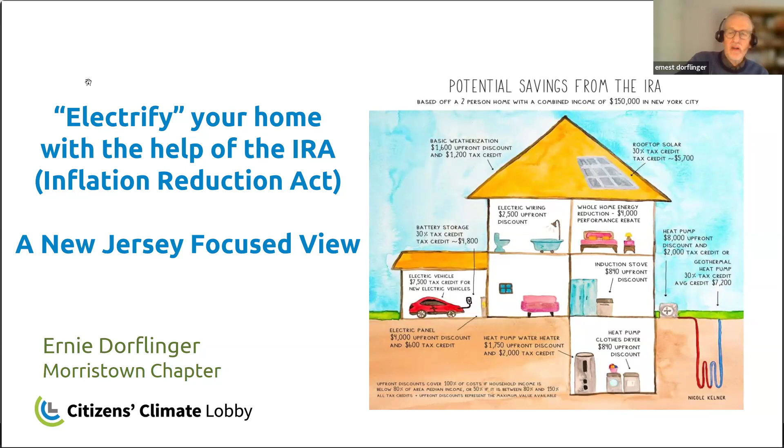Okay, so I'm going to talk about electrifying residences in New Jersey. This is a New Jersey focused view. A lot of this became very topical with the passage of the Inflation Reduction Act, and you'll hear a lot about that in this talk as well.

I've given several presentations on this topic over the last year or so, and it's designed really for the average New Jersey homeowner, to give them some information, not too deep, but some information, and with that, some confidence that they could hopefully start to begin the process of electrifying their home. It is a process, not just a one-item thing. I also am a little bit concerned about whether there's more we could be doing to help ensure the success of residential electrification in New Jersey. I have some ideas, and I'm also interested in other people's thoughts, and I'm going to talk about that with a few slides at the end of the presentation.

The Inflation Reduction Act was passed with a lot of fanfare and excitement. It's been a year and a half now, or even slightly over. And what it provides for home electrification is financial incentives in the form of tax credits and then rebates.

The tax credits are available now. You can put them down on your 2023 taxes. I did some windows in 2023, and I'm getting the tax credit for those. Rebates aren't ready yet, however.

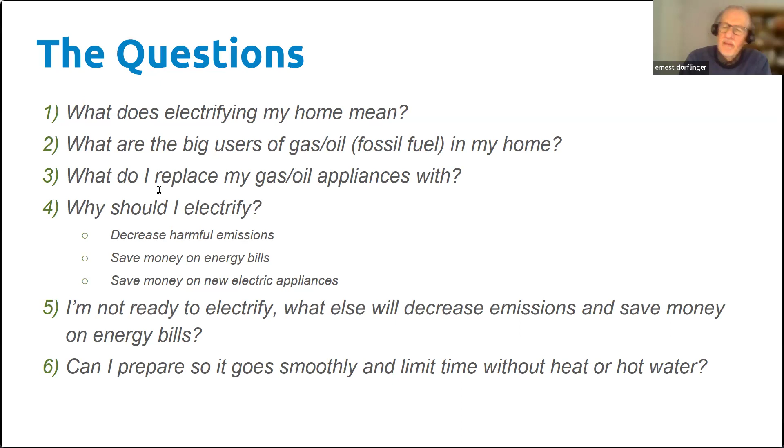So what does it mean? It means, for the most part, replacing the gas and oil burning appliances within your home—if you have a furnace, a boiler, gas-fired hot water heater, or oil-fired gas clothes dryer, gas cooking—it's replacing these fossil fuel burning appliances.

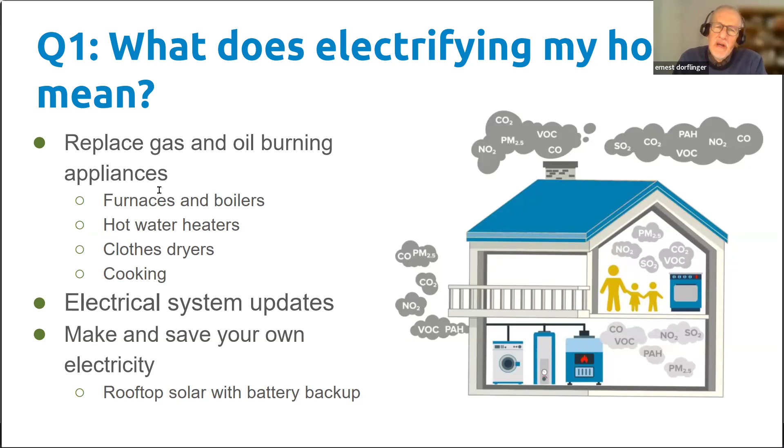As you can see, it's illustrated cutely in that little house, where we're pumping these invisible pollutants out into the air. To put in these new appliances, your home may need electrical system updates—we'll talk about that. And if you've got the right roof, orientation, and it's sturdy, we'll talk a little bit about rooftop solar and battery backup as a way of making your own electricity and storing it.

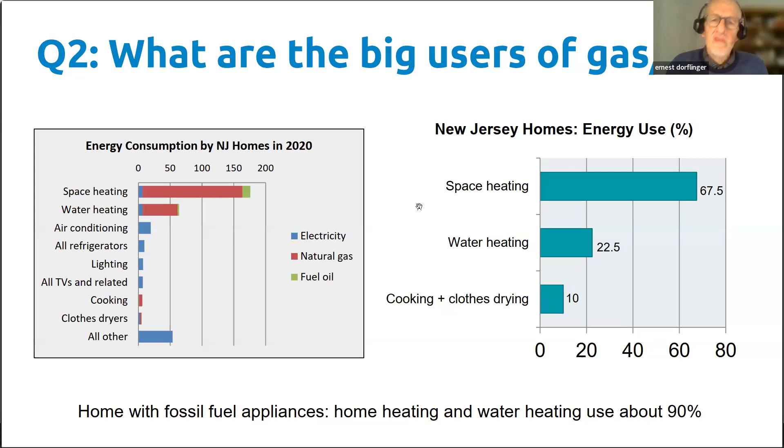Water heating is about a fifth to a quarter, and the other two common items, cooking and clothes drying, are relatively small at 10%. So if you're looking at decreasing emissions and want to attack that in your home, the place to go is your space heating and then your water heating.

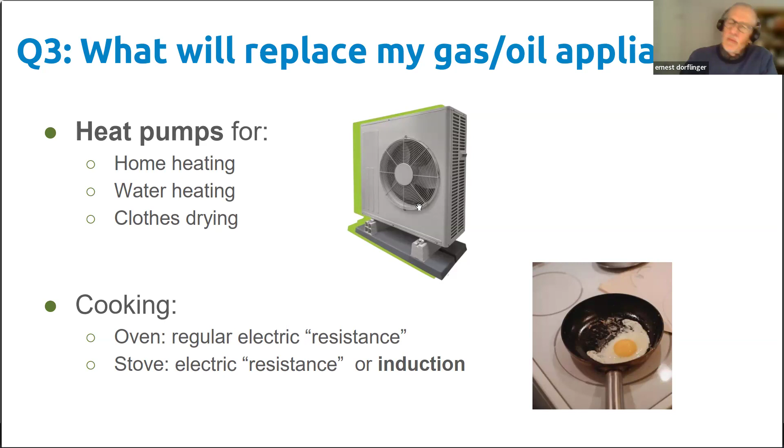So what kind of devices are going to replace those things? Well, the big thing is heat pumps. There's a picture of an air source heat pump there for heating the space within your home. There are heat pump water heaters becoming much more frequently available, and clothes drying as well. Heat pumps cannot provide enough heat for cooking, so the electrical use there is what we call electrical resistance heat, which is what a traditional electric stove is, and more recently induction electric stoves, which we'll talk about later - but I'd imagine many of you have some familiarity with that already.

Now stepping back to the three main reasons - everybody understands this to some extent. It's to decrease harmful emissions, to save money on energy bills, and to spend less on new appliances. You can buy new electric appliances for less than replacing your gas appliances.

So what are the harmful emissions? We can sort of put them in two categories. Global warming gases are harmful by causing climate change - CO2 is the biggest culprit, but more potent are methane and nitrous oxides. Methane is what our natural gas is, so when it leaks out, it's a very potent greenhouse gas. Nitrous oxides are also not only toxic but also very potent greenhouse gases. There are others too, but these are the main three.

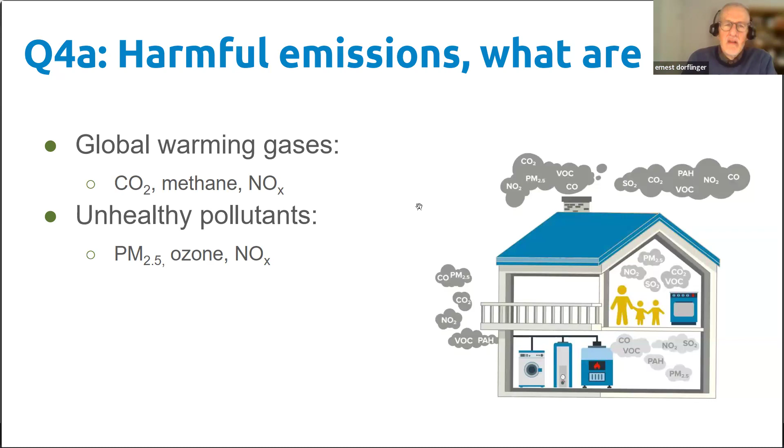But also, when we burn these fossil fuels, we create unhealthy pollutants that harm our health - these are particulate matter, or for shorthand, small particulate matter, so PM 2.5 sometimes called, ozone, and nitrous oxides. So if you electrify your home, you're going to diminish the amount of these harmful gases and pollutants.

Now, if you fully electrify your home, you will eliminate those emissions from your home, but you're using electricity probably from our grid, and our grid is not entirely clean - it's about 50% fossil fuel, 50% clean, including nuclear. But because of the efficiency of heat pumps, when you switch over and still use grid energy, you're probably decreasing your emissions by about 75%. And that's only going to get better over time as the percentage of clean energy in our New Jersey grid goes up.

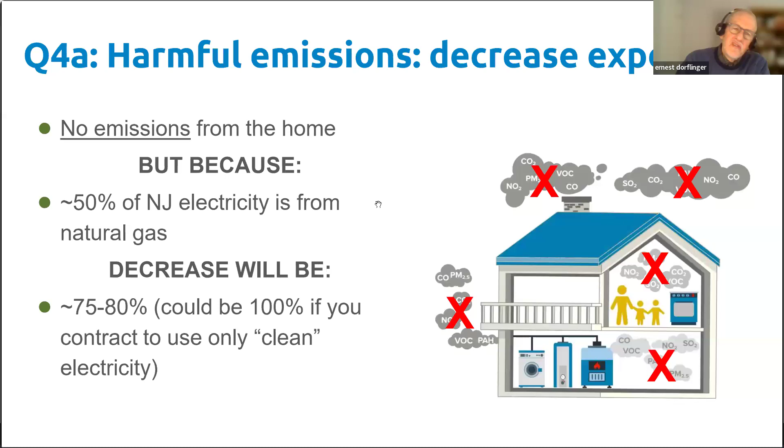And also, if you put in a ground source heat pump, you will save on your heating bills. But in New Jersey, an efficient gas furnace and an air source heat pump might be pretty close in terms of energy bills, especially in this PSE&G territory, which seems to provide a relatively low, comparatively low rate of natural gas. It's going to depend on what system you put in, whether you modify ducts or go ductless, but I would say there's not likely to be big energy savings today in New Jersey going to electric heat over natural gas heat.

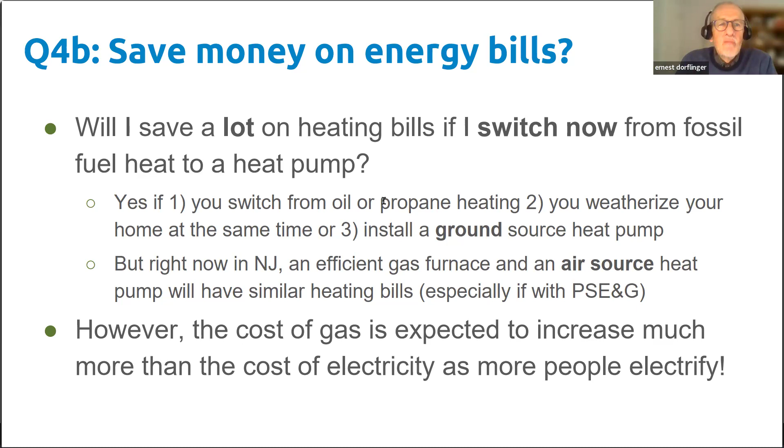This information comes from a study done in 2022 by the BPU in New Jersey. They're concerned about what people are going to have to face in terms of utility costs in the future, so they commissioned this study to look at what the predictions would be for the cost of electricity versus natural gas as heating fuels or energy sources. They looked out to 2030, for what they were calling the average New Jersey home, whether that home remained on gas heat in 2030 versus whether it switched to a heat pump.

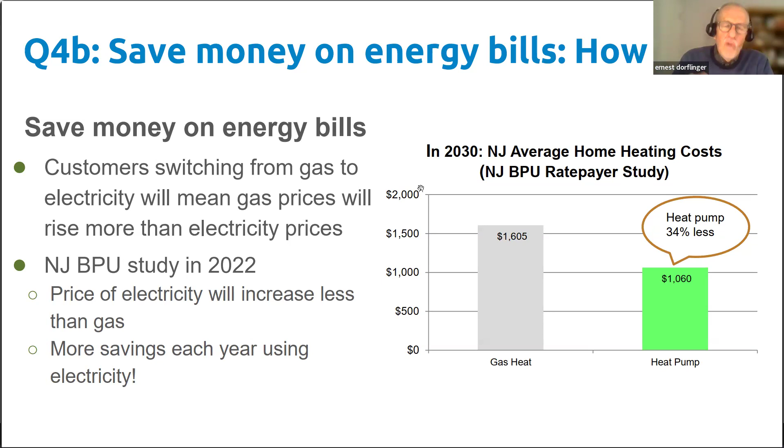Because of the rise in price of gas being more quick than electricity, there is a substantial difference in heating bills in 2030, from $1,600 per year down to closer to $1,000. Reading through the report, this seems to be due to the fixed costs of maintaining the pipeline systems for natural gas, which are shared among many people right now. As fewer and fewer homes require natural gas hookups, those fixed costs are going to have to be spread over the remaining customers, and that probably accounts for some of this rise in gas being quicker than the rise in cost of electricity.

A typical home can save about 15 to 20% on their energy costs. Leakier homes, as the Acadia Center reported, can save almost twice as much, maybe even up to 40%. There are a lot of leaky older homes in New Jersey. So weatherizing itself can save money on energy bills, but there is a cost to getting it done, and that's going to vary depending on what kind of rebates and other resources are available. Weatherizing is something to not forget about.

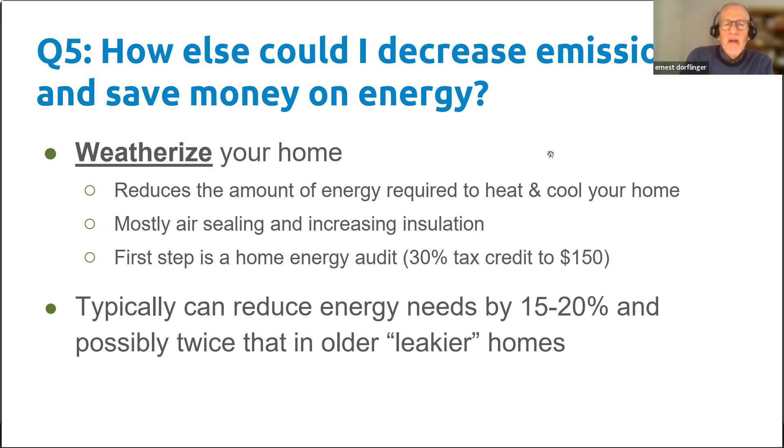Putting in a heat pump system can be a little time consuming. It's much easier if you've got a furnace - they find the current version of that furnace and they plop it in. They don't have to adjust too much; maybe there's a little additional electronics involved, but it's not as complicated as moving to a heat pump. It will get easier as heat pumps become more common, but right now there does seem to be, in many cases, a slower installation when it comes to a heat pump.

This happened to my son during the cold snap last year. Their furnace went out, and we had the contractor in, and we said, 'How about a heat pump?' And he said, 'Well, a heat pump, maybe 2 weeks. I can have a furnace in tomorrow.' So they put the furnace in.

Just one reason this can happen is you may need to change your electrical supply. We'll talk about that more, but you may need an electrician to come in to provide the power for the heat pump. And acquiring the heat pump sometimes takes a little bit longer.

So what I'll say here is make a plan. If you can avoid it, try to anticipate when your system's going out. Is it breaking, needing a lot of service? Is it very old? Even if you want to wait a little bit, it may be worth having someone come in and look at the system and give you an estimate on a new system, so at least you've got the jump on what you might want to do should your system go. Making a plan is a good thing to consider.

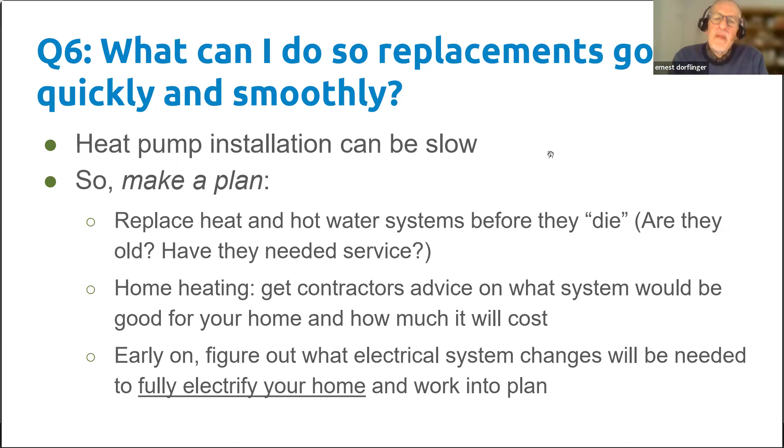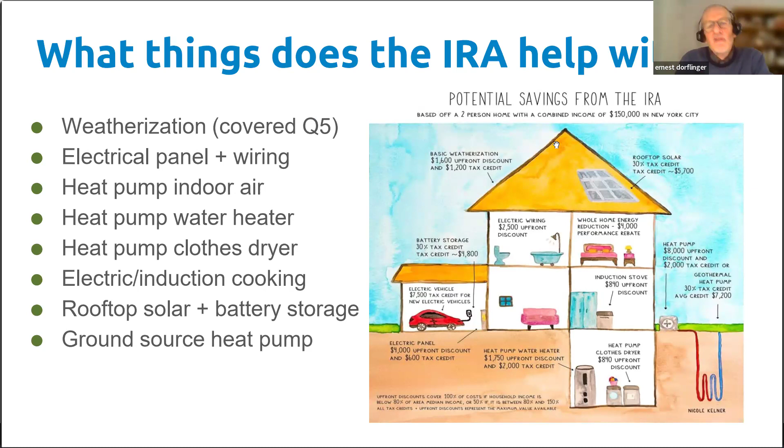These are the items I'm going to go through rather quickly. I covered the weatherization already in question 5: what can you do if you're not ready to electrify? I'll go through these other items one by one, shown in that cute graphic there.

So in order to power these appliances, you may need to have the supply of electrical energy to your house increased, which is a separate thing from needing to increase your circuit breaker box, or your electrical panel, as it's sometimes called. If you have a panel that has, say, 200 amps, you're probably fine. If it's less than that, you may need to have it updated.

It's going to depend on things like whether you have an EV, whether you have a solar system, whether you're comfortable with switching from one item to another. So if you have a 100 amp panel, you might need to have some kind of a smart switch or something. So you need to give that some thought as to whether your panel may need to be increased.

The heat pumps in general, except for maybe window heat pump units, they're usually 240 volts. So are most central air conditioning systems. So sometimes you don't need to update because you're putting a heat pump near where the central air was, so you're fine. But other times you may need to put in 240 volt circuits. That's also true for hot water heating heat pumps, except that they're now coming out with 120 volt versions of the heat pump.

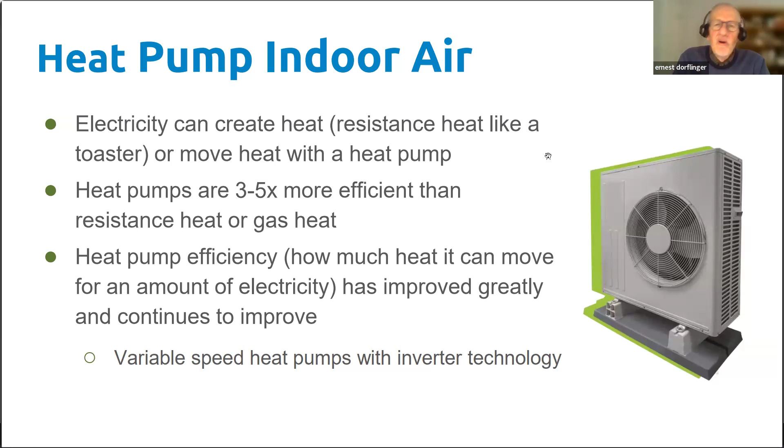A term you'll hear for these more modern heat pumps is variable speed heat pumps, or you'll hear inverter technology. I can't speak to those in great detail, but those are the words you look for. How well do they work? Well, one example is the Mitsubishi H2i hyperheat system, and they're almost fully efficient. They're as efficient in providing heat at 0 degrees as they are at 50 degrees. But those are cold climate heat pumps. Not all heat pumps are created equal.

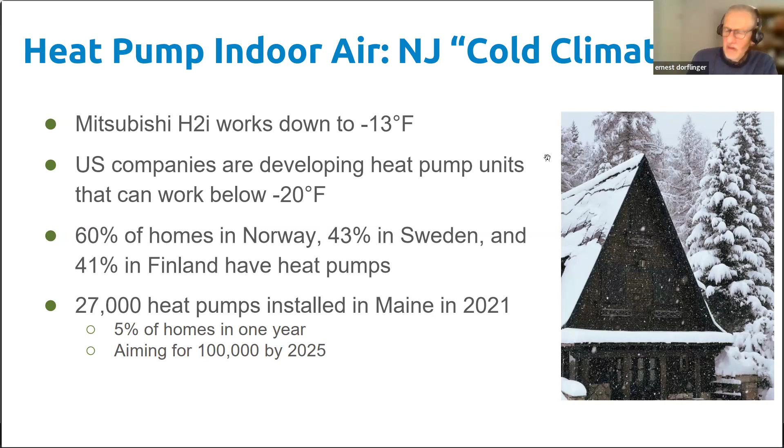And there's a big effort going on now, and there's actually a challenge that the Energy Department is running for companies to create much more effective cold climate heat pumps. But they're out there now. They do exist. You can see the numbers there for the Nordic countries. They're putting in heat pumps like crazy. They're happy. Maine is very happy. They have a lot of heating oil up there, so it's very expensive. So the state chose to support this transfer to heat pumps, and it's been happening well ahead of schedule. So cold climate heat pumps are real. And in New Jersey, if you have a cold climate heat pump, that's all you really need.

Heat pump water heaters, similarly. You can buy an electric resistance water heater, but it's going to use 3 to 5 times as much electricity as your heat pump water heater. And as I mentioned earlier, 120 volt versions are now becoming available. I think there are 2 on the market, a third to come soon.

They're going to get better too. There's a lot of competition in this area. A couple things for homeowners to keep in mind: it takes the heat out of the air around the hot water heater. So the area in the region of the heat pump water heater can get cool, so people need to be aware of that.

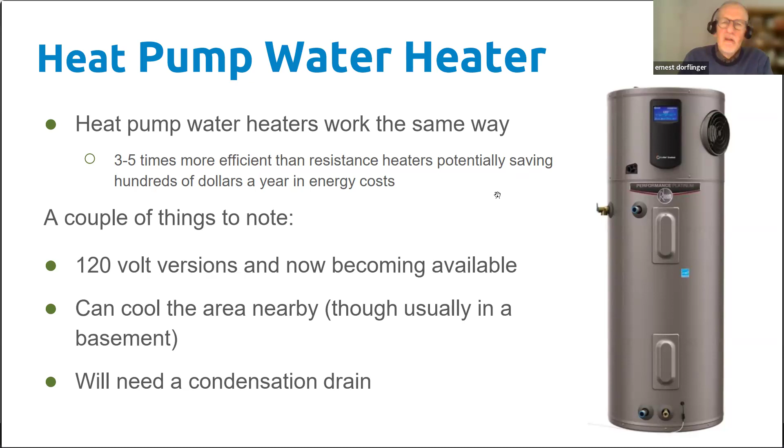And it will need a condensation drain, something you don't need with your gas-fired water heater. It's not a big deal, but you've got to have a place for that water to run off. So new technology, there's just often a new twist. Heat pump clothes dryers, basically the same story. They may take a little longer to dry. They will need a condensation drain. Not a big deal. It's next to your washing machine.

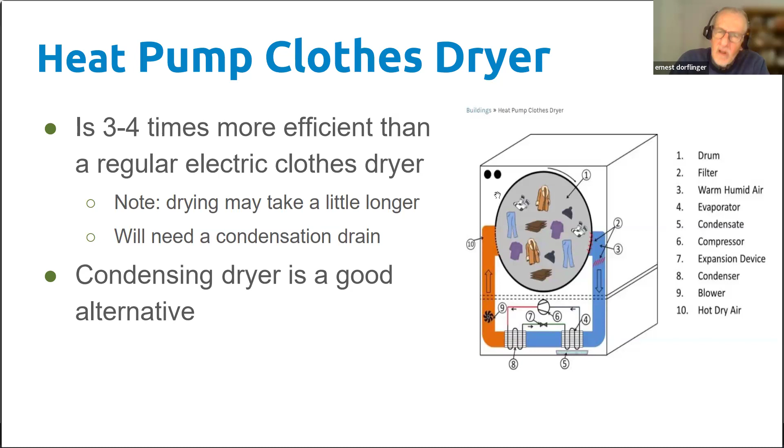And other than heat pump clothes dryers, what they call a condensing dryer is also a good alternative. It just uses electricity and takes a little bit longer, but still is a reasonable thing to consider. Cooking. Obviously, if you're not burning gas at your stove, you're not creating harmful indoor air pollution.

The resistance heat ovens, the old traditional electric ovens, you know those, they get stuff burnt on them. It's hard to get off. They discolor. You can burn your fingers. They don't respond very quickly. They work, people have them, they adjust, but the induction burners are much better. They are probably as nimble and quick and precise and fast as any gas stove, and they don't get hot. It's a magnetic field that makes the heat show up in the pan and not on the top of the stove, so it never gets hot.

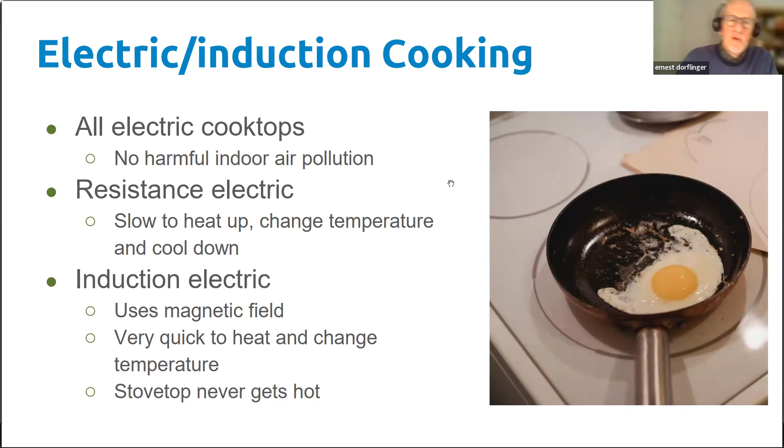Rooftop solar. I don't have it. I got too much shade. I know plenty of people who have it, love it. But you do have to have the right roof. You do have to be concerned about the sturdiness and the age of your roof. But if your system works for you, this can be a great thing. And also, if you're going to put in solar, consider battery backup. It can be expensive, but it's coming down. So those are ways to not only electrify your home, but make electricity at your home and use that electricity.

And ground source heat pumps is the same concept for moving heat from one place to another. But instead of taking it out of the air outside of your home, it takes it out of the ground. And it's a big investment. It's a lot of work. There's two main ways it can be done, which is deep loops going down 200 or 300 feet. You can see those pipes going way down, or you can do sort of a subsurface route where it might be buried by 6 feet, but then you need a fairly large surface area that's usually quite a bit larger than the footprint of your home.

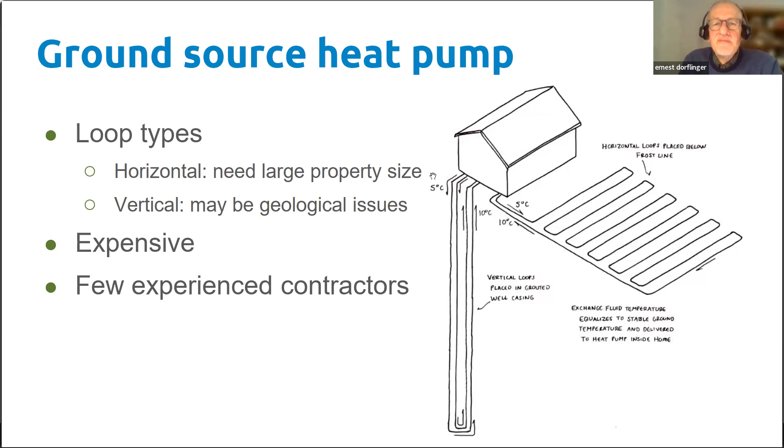Okay, now the IRA. This again, a little over a year and a half ago, it provides tax credits, and those are available now. There's the capped type, which are the 25C, and I'll show you in the table later what those apply to. And then there's the uncapped, where it's a straight 30% no matter what your cost is. And you can also carry that credit over from one tax year to another if you need to. And with these tax credits, if you do get a rebate, you can still take the tax credit on the amount that you still have to pay after the rebate. So you can, what they call, stack these incentives.

Now the rebates, home energy rebates, there's two types. The HOMES, or the home efficiency rebate. I say they're in effect now, and they did issue a clarification that says that theoretically they went into effect the day the IRA was passed into law, but it has to meet all the criteria of the ultimate approved plan. So you take a gamble that if you do something now, it's going to meet the plan that eventually gets approved by the federal government, this New Jersey state plan. So I say it's in effect, but I don't think people are going to be taking much advantage of it yet. And the other category is the home electrification and appliance rebate.

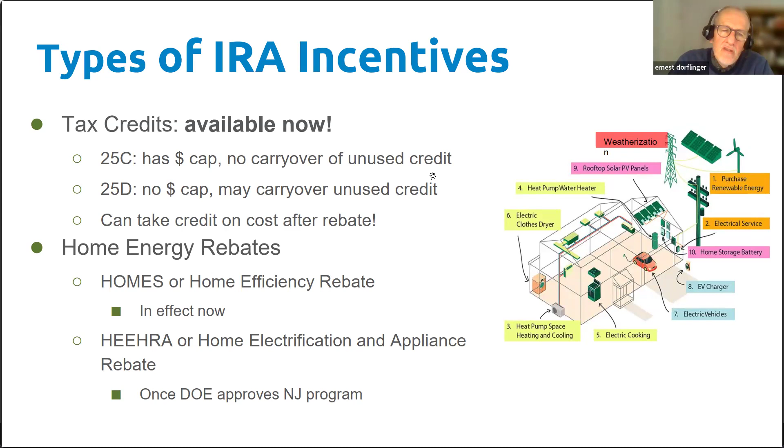And those are not available. Those won't be available until the Department of Energy approves New Jersey's program. So a little more details on each of those categories.

The homes, now they're switching their language to calling it the HER, for the home efficiency rebate. This is a whole home energy retrofit. So it's sort of big time weatherization. So it's targeted to reducing the home energy use. So weatherization with adding insulation and doing air sealing to avoid air leaking in and out, air pathways which you lose heat or cooling.

But it may apply if someone unfortunately had a system like an electric baseboard, a very inefficient system, that the HER rebates may apply to replacing that kind of a heat system. But mostly it's targeted at energy efficiency retrofits, insulation type work.

It has two categories for level of energy savings and two categories of incomes. You can see in the table there. So if you can get more than 35% reduction in energy, then the rebates are higher, up to $8,000 for low income. And it does not have an income cap. So the lower income gets sort of double the rebate, and then any income above that gets the lower level of rebate.

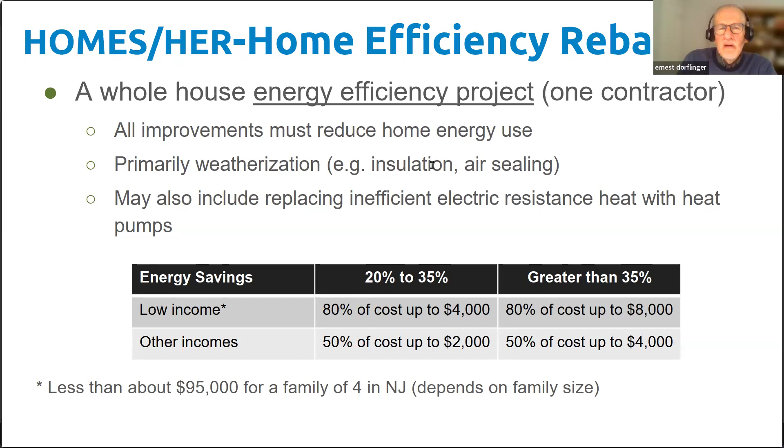To qualify for the low income, for a family of 4 in New Jersey, that's going to be a household income of about $95,000. So these are the HEEHRA rebates. These are mostly discounts or rebates on single items: a heat pump, electric stove, induction stove, electrical panel. These are limited.

They're only available up to 150% of the area median income, and that's about $178,000 for a family of 4. It's higher for bigger families. And it's only available if you're replacing a fossil fuel appliance. So you can't replace your resistance stove with an induction stove. It has to go from gas stove to some kind of electric stove. When will these be available? Don't know yet.

These are just some numbers in case people were interested. You can see these are the area median incomes for what's called the New Jersey Metro, which covers most of North Jersey, I think. And so if we look at the median income, family of 4, that 80% threshold, as I said, is about 95,000. And then the mid-level income category is up to almost 180,000. And it's up over 225,000 or something like that for a large family of 8. So it does have a sliding scale.

This shows you how complicated some of the rebates can seem. So I've tried to show, I'm not showing any of the home efficiency rebate here. This is just the HEEHRA rebates, and the tax credits. So you can see on the left, the HEEHRA, so the low income, less than 80% median income, and then the moderate income in green.

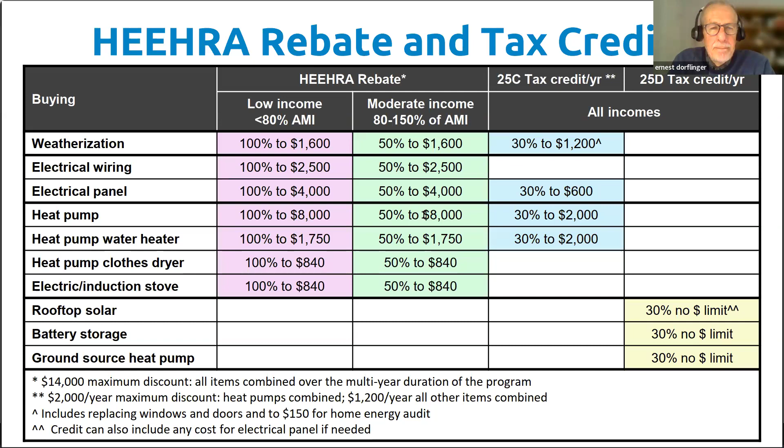Rewiring America is a great site. If you want to explore some of these numbers yourself, you can go there, put in your zip code, your tax filing status, household size, and approximate income, and it'll tell you what level of rebates you may qualify for.

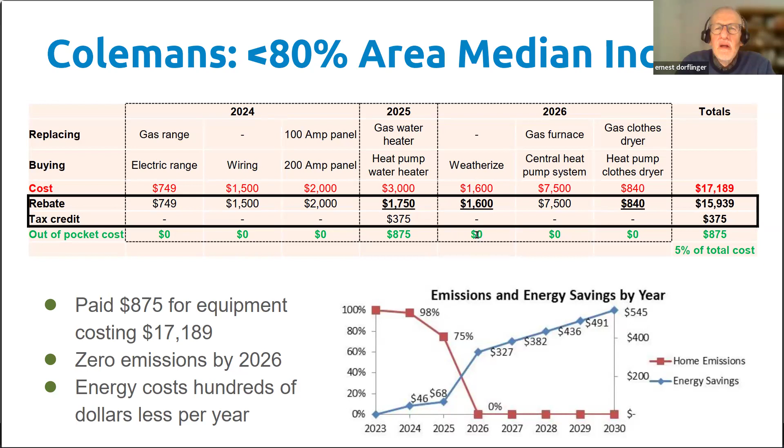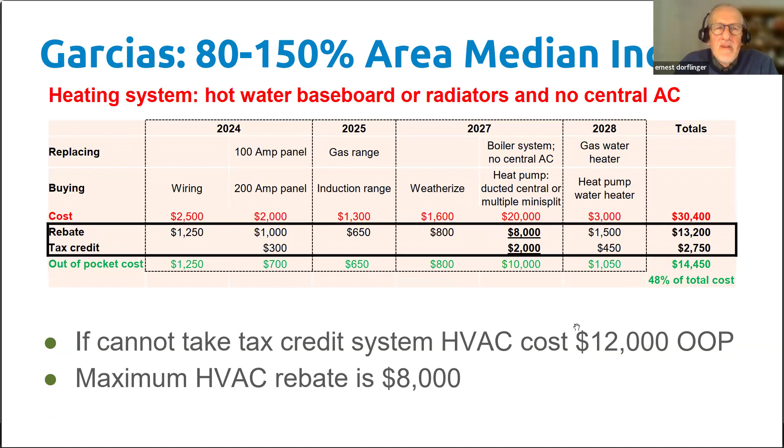I'm going to skip this one. It's fun to talk about, but we don't have time.

Then there's the upper income family, where of course they don't get any rebates. So the only money they're saving is up to 30% on tax credits. They're paying about 81% of the total cost in this example. But again, the emissions go down and the energy savings go up. I assume the annual energy use was about twice for this family, so that's one reason why their energy savings seem higher, because they have a bigger home and use more energy. So this is an example of hypothetical families taking advantage of electrifying their homes.

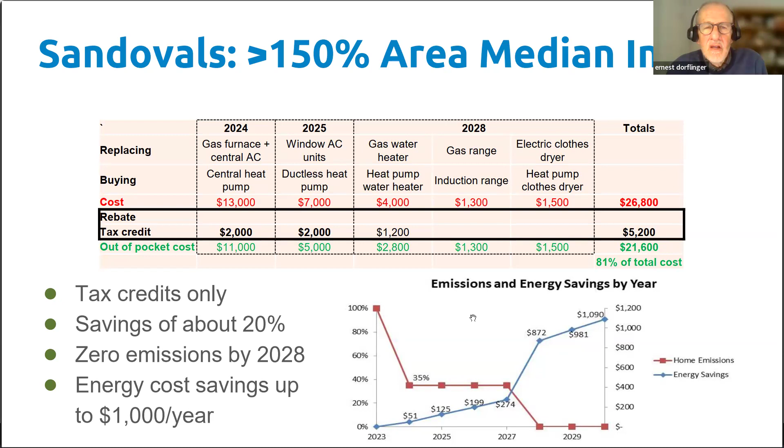So I mentioned the third reason for electrifying, and that is that for many people, particularly non-high income people, they may be able to put in brand new electric appliances for less than replacing their gas appliances because of these rebates.

There's one kind of difficult point right now in electrifying your home: if you have baseboard hot water with a boiler system. That gets a little trickier because there's no adequate current heat pump system you can put in to match that kind of hot water system. So that's one situation that can get a little more complicated, but I'm not going to go into that right now.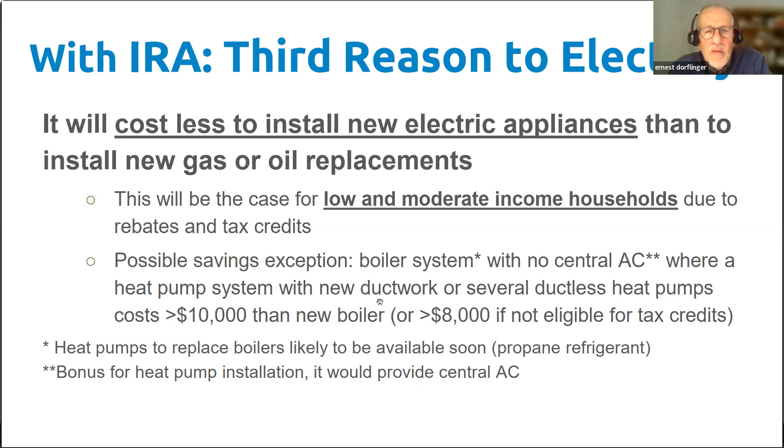As I already mentioned, higher income families will be paying the bulk of the cost. I'm just considering the IRA now. I did not wrap into those hypothetical cases the potential New Jersey rebates. Those could actually switch the situation. So even in this higher income group, it may actually cost less to put in new electric appliances than replacing with gas appliances. But we still don't know the final New Jersey rebates and any rules that will apply. So it's possible that even higher income families will save.

Where can you start? A home energy audit's a great place. They'll tell you whether you need to weatherize, whether you need insulation or air sealing. They can advise you on your heating system, whether it's on its last legs, and give you advice on what kind of replacements to consider. They can test the leakiness of your home using a blower door test, which will help you decide how aggressive to be with air sealing.

As I mentioned earlier, start thinking about this, start making a plan, thinking about timing, what comes first, electrical panel, hot water. Think about the rebates, keep an eye on where your income is relative to what's available. You want to do it right. You don't want to jump into something, do it, and then come back and say, I wish I had done this a little bit more carefully.

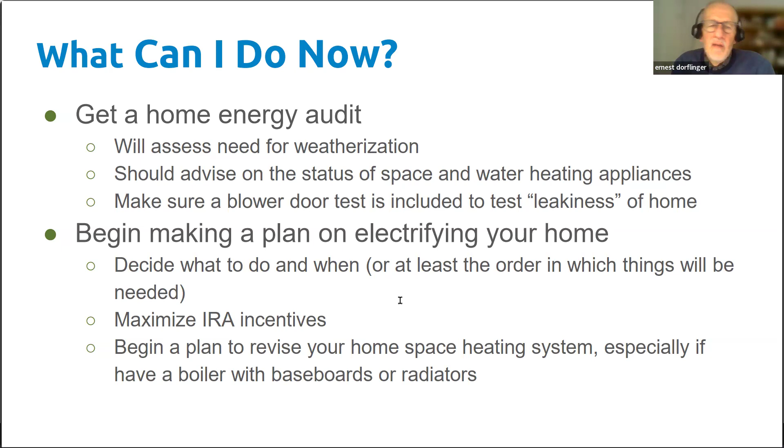Now, back to my question of how do we, as a state, electrify our homes? I think the first part is obvious: to decarbonize our home, we need to stop burning fossil fuels and use electricity instead with heat pumps in general. We need to continue to decarbonize our grid, and weatherizing our homes to decrease energy demand are four key components to decarbonize.

What policies exist that are going to help drive this? Well, the financial incentives—that's one of the main reasons we're talking about this, because of the IRA. If there were no IRA, we wouldn't be talking about this nearly as much. So these are the financial incentives of tax credits and rebates, and perhaps nice rebates from New Jersey utilities as well.

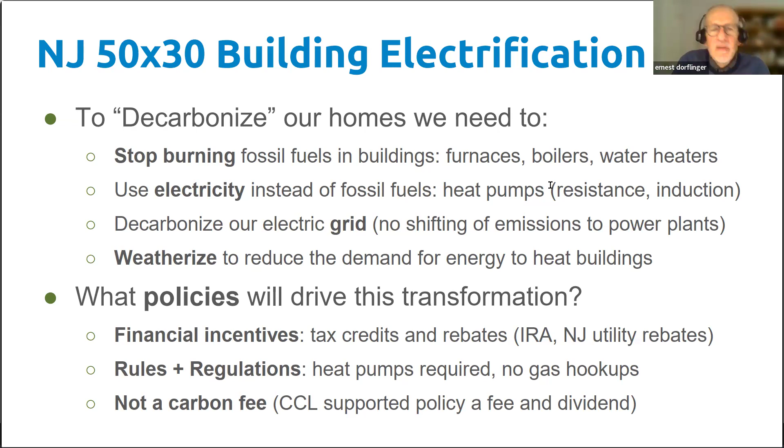As a member of CCL, we've been advocating for a carbon fee and dividend program for many years, but so far we haven't gotten enough political support for that. That would be another policy that could drive a transformation, but it's really not happening yet, and may never.

So you heard my talk, and you have some sense of what this is—it's a complicated process. I've attended these monthly conferences, and we've heard several times where people had multiple contractors come in, and every single proposal was very different. They were very hard to compare. Different types of heat pumps—some will come back with boilers or furnaces, or inefficient heat pumps. So it's difficult right from the contractor proposals.

It may involve more than one contractor. You may have to coordinate, you may have to be the go-between, so it can take a lot of effort on your own part. It can be difficult to decide on the sequence—what's first, what's second. And contractors may push their favored systems and products. So you may say you want a cold climate heat pump, and they come in and try to convince you of something else. It can be complicated.

And then the financial incentives are complicated. The tax credits are complicated—I had a pretty hard time finding out what kind of windows would get me the tax credit. I challenge you to try to find out, it's amazingly difficult. So the tax credits can be complicated, and making sure you meet the CEE criteria or the Energy Star criteria is complicated too. I didn't even talk about that earlier, but those are difficult as well.

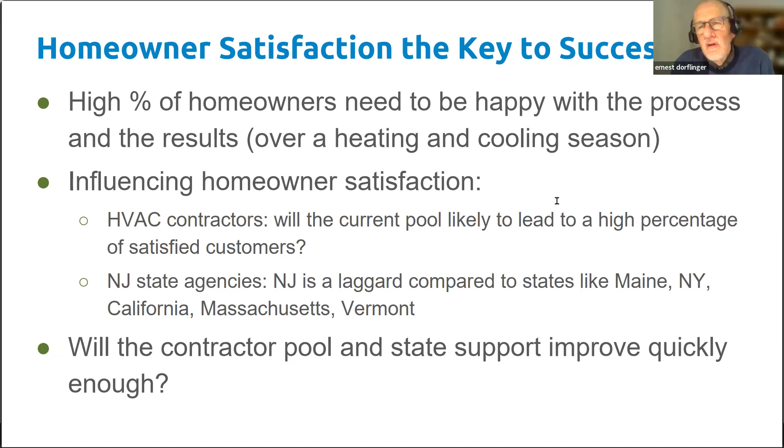I threw this out as where my thinking is: what can we do to help improve the situation? Can we lobby for New Jersey programs to provide a high level of homeowner support, guidebooks, helplines, etc.? As Steve mentioned, I've been trained as an electric coach and as a heat pump coach. That can help, but you're going to need a lot of electric coaches and heat pump coaches to cover it. If 10% of homes in New Jersey start converting, or even 5% a year, that's going to be a big demand. I just wanted to get out some thoughts in this forum about what we could do to help this important process of electrifying our homes.

And with that, I'm done.

Great, thank you so much, Ernie. That was really a lot of information. You're welcome. And there are really a lot of questions too.

Let me just start. From the beginning, Mary asked what is a moderate income home, and you later showed a chart of that. Yeah, it'll be in the slides, and it does depend on your family size. But I think moderate income was up to about 175, and low income was about 95, something like that. It's pretty high because we're a high income area.